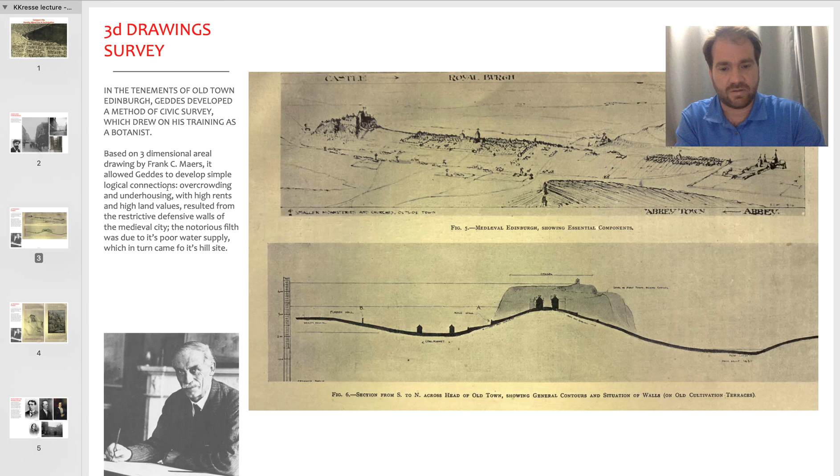This is an image of Maers, a collaborator of his. With him, he made these 3D sketches, sections, analytic sketches, and collaborated in these studies.

Some more of these sketches. So his frame of analysis varies quite a lot. On the one hand, you see how he's studying this city behaving within the context of the bigger landscape, or the region, if you want.

But then he's also looking at projects like these backsides in Edinburgh, and how to make them flourish again, reorganize, and green them again.

So I guess you can say that one of the main features of his work is to be very context specific and not so much scale specific. Context is extremely important, and to work with the context rather than a fixed idea that is superimposed on an existing context.

If you remember from one of our first lectures, I made this division between urban thinkers, where on the one hand we had the ones proposing that urban planning and urban design should be done by well-trained smart individuals that get a lot of power, because these specialists can make better decisions for the people than the people themselves.

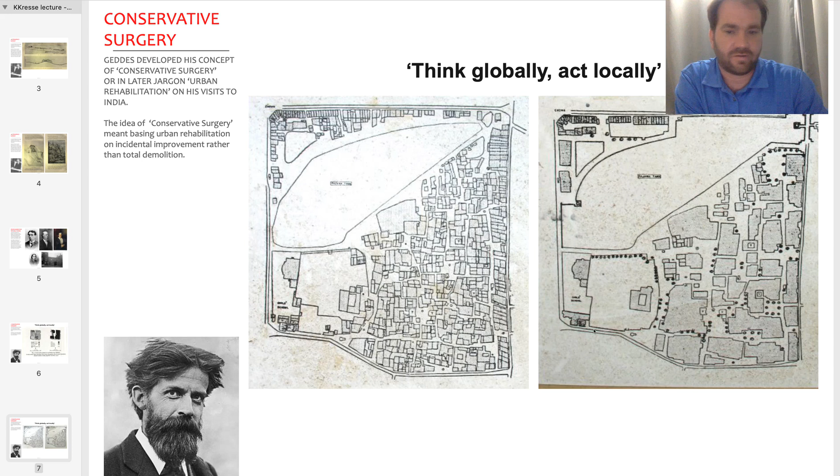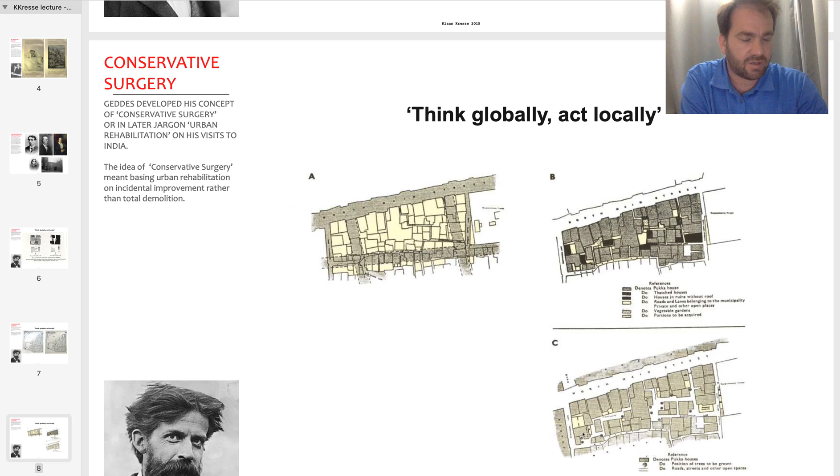This is another example of the same thing. Again, you see existing urban fabric in this brownish gray. It's overlaid with what top-down planning authorities were proposing, and instead of this kind of gridiron plan, he is making this very delicate analysis of the different qualities that you have there, and then proposes incidental demolition or redevelopment and improvements to the public space, to end up with this new urban fabric.

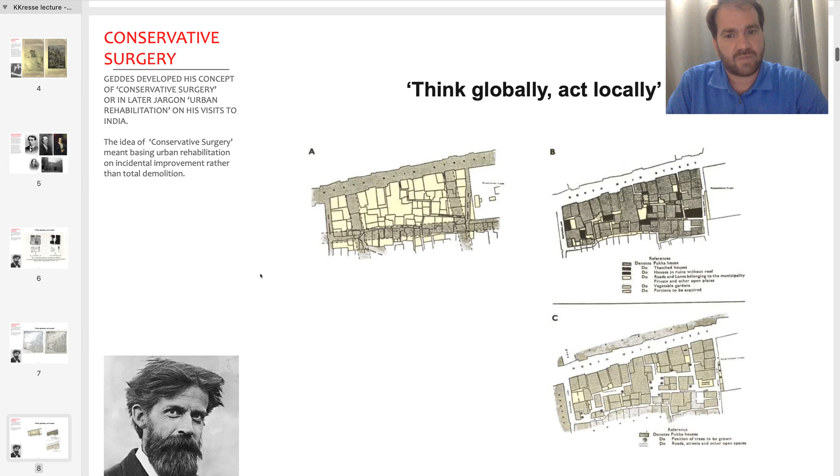So today it's called urban rehabilitation, and we will also see that this has some reference to Seoul, where this kind of strategy now has been taken over since Mayor Park tried to diminish the old new town redevelopment projects. But we'll see that in a little bit.

So another example from India. As you know, the British were the colonial power in India, and Indian cities were notoriously in bad state. One of the main problems for the spreading of diseases and the dirtiness was the lack of a good wastewater and sewage system. So then, for example, here in Balrampur, beginning of the 20th century, the British tried to impose a new city development in which they had high ambitions. So here, every house should have their own toilet.

So, of course, this is a good ambition, and carrying this out would help the city tremendously. But what Geddes would criticize about this type of planning is that it's not really feasible to carry out for the entire city. So what you could do is take part of the city, maybe a neighborhood or a bit more, that is built impeccable with all the standard of living as you have it in England at the time. But then you wouldn't be able to afford to improve living standards in the rest of the city. So it becomes very selective, right? And what he points out is that just the choice to build this water flushed latrine would cost as much, if you combine it with all the costs for infrastructure, as the rest of the house.

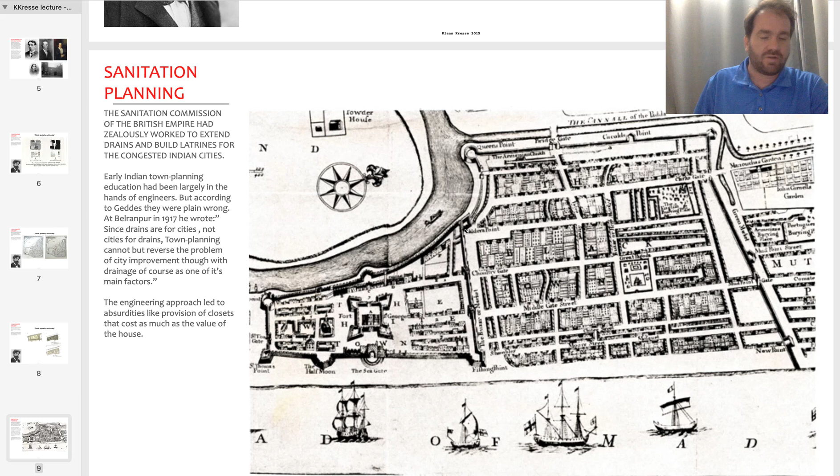So that he would call absurd. Instead, what he's proposing - I'll show you in a second. But the result was that once this has been carried out here in this area, this looks like it could be in England, right? But then on the other side, you still have the informal city that has been growing wildly with all the problems of overcrowding, sanitary problems, and so on. So in a way, you don't really fix the problem. Generally, you only fix it incidentally and locally. And what Geddes is looking for is a system that could help everyone despite the lack of funds, despite the lack of money that the government has to implement it.

And this is his idea that I was introducing earlier. So what he's saying is that one should look at the way that the people live, the local economy, the occupations of the people, customs, history, and so on. And what he came up with is an idea to try to clean the city without having to build this tremendously expensive sewage system with all these latrines in every house. So he's referring back to the occupation of the street sweepers that you would have in India, which could, next to sweeping the streets, also be the persons that collect the feces from the houses.

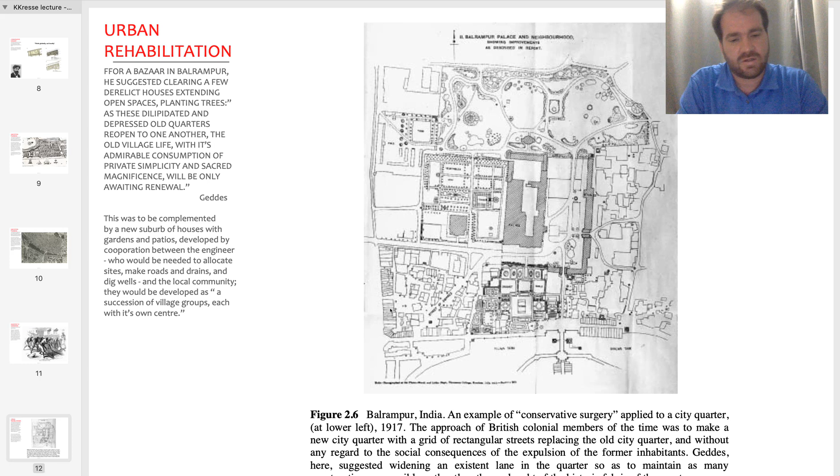And the whole exercise has something to do with trying to find beauty in the existing structures, existing culture, even though not everything is perfect and shiny. It's a different way of appreciating what is there, and it's looking for a different kind of beauty, if you want. So what he's saying is that this approach would be cheaper. You could help more people, even though you help everybody only a little bit. You could help more people, and it would be cheaper, and in the end would improve the living conditions of everybody. There would be less sickness and less death rates.

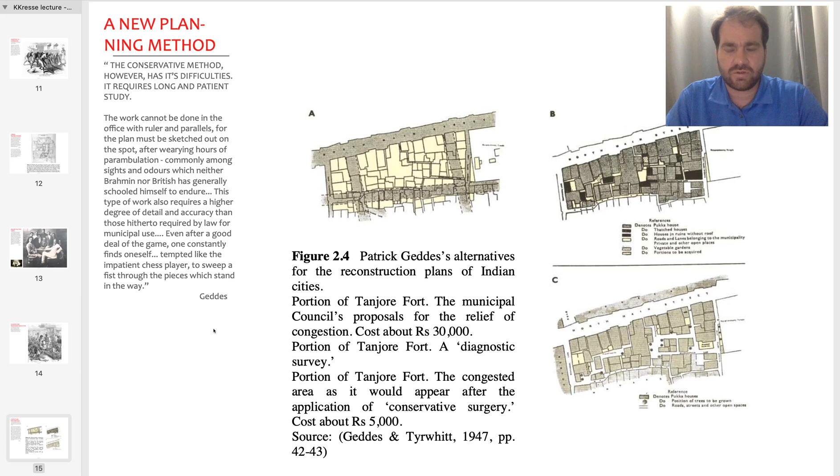This just as a kind of reminder of how this process works. And then from here, I think we should go to Seoul. Right, next one is a new planning method for Seoul, which in fact has been around since the beginning of the 20th century. So this idea of urban rehabilitation is already more than 100 years old, but nevertheless still used.

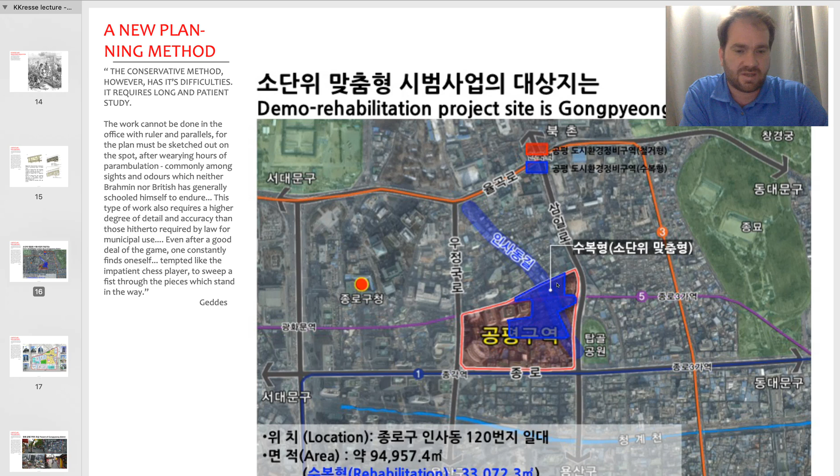So here, this is an example of urban rehabilitation in Insadong. Everybody knows Insadong, I suppose. Gyeongbokgung over here, and there's the main street, the pedestrian street going down here, and this then should be extended into this area. The original plan is what you can see here with the blue and the red outlines, and the existing fabric is what you see underneath. So the existing urban fabric is very small scale.

Lots of traditional houses, probably hanoks, and other old houses. Urban grain is very small, very densely built, and you have only small narrow alleys. Not only, but a lot of small narrow alleys that are walkable, and few streets that can be used by car.

What the new plan was proposing is to combine these lots and then redevelop them with big buildings. So that's what you can see here. The blue ones are the ones that have already been carried out or are under construction at the time, and the red ones are the ones that are planned but have been stopped by City Hall in order to try a different approach.

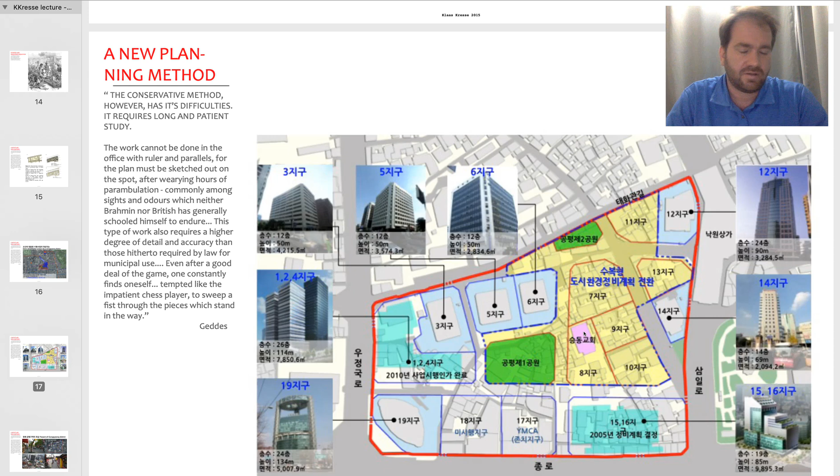So this is urban rehabilitation. What they did instead is define a planning area. Essentially this is what was left, what has not yet been developed. Similar to what Geddes has been doing, they looked at the qualities of the existing, or tried to find qualities of the existing.

For example, the narrow alleys with all the small restaurants and cafes, which looks quite messy and not beautiful in the traditional sense, but on the other hand it's very original and in a way sympathetic. When I have friends coming over from Europe, I always take them to these areas, and people are always impressed with this, right?

We don't have that in Europe, and these kind of small spaces are often so lively and active, and it confirms a little bit the maybe romantic idea of Asian cities that are busy and full. That's an experience you can find here. So it makes sense to have such a strategy in an area like Insadong, where a lot of tourists come, but of course it could happen in other places as well.

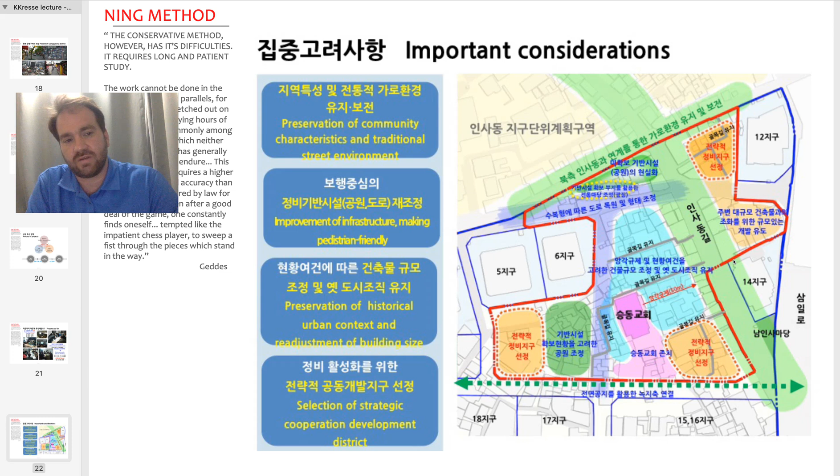Different type of zoning, right? They decided what part of the urban fabric to keep, what kind of zoning goes where, how to improve the infrastructure, what characteristics to preserve, what kind of identity to preserve, and also what kind of industry to stimulate, or what kind of local business they want to support. So actually it's not only about the urban fabric, it's also about the people that work or live there, and how we can provide them with a new way of living, or maintain their existing way of living, even though the area is changing.

Yeah, and that's what you see here. This is the old plan, and that is the new plan. So much more diverse and small scale.

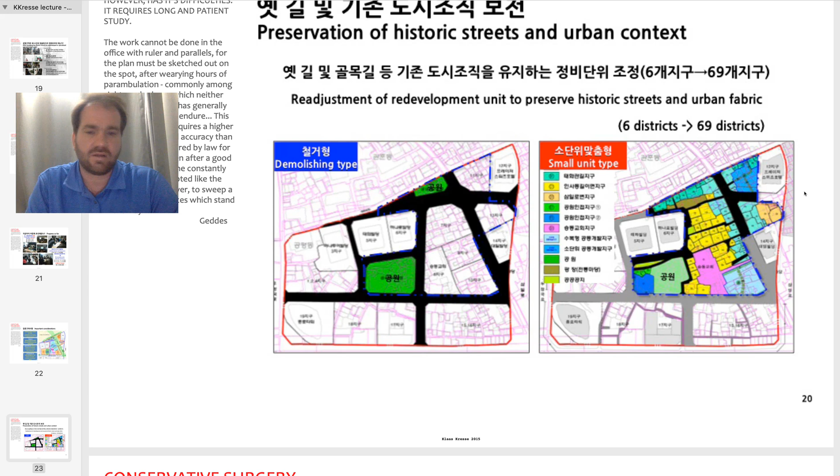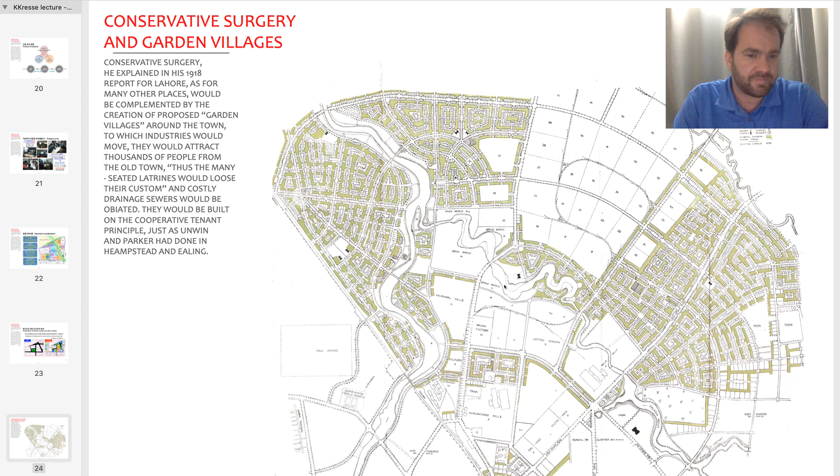And then, this is another image going back to Patrick Geddes and his ideas for India. So this is more to be complete. Patrick Geddes did not only make plans for urban rehabilitation, but he would also make plans for the layout of new developments of entire quarters of a town, as you can see here, where it's much more traditional, with a kind of perimeter block, front yard, backyard idea. So this type of planning he would do as well.

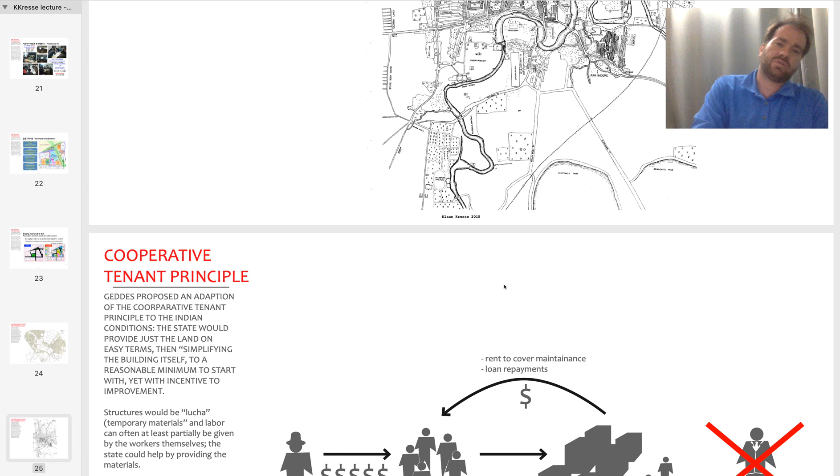Another image of one of his projects—I'll go through and introduce what he calls the cooperative tenant principle. Here you can see the universal approach of Geddes: he's not only thinking about the space and how to improve it, but also how to maintain the culture and local economy, local businesses, and work with the people of the area in the redevelopment process. So he proposes this cooperative tenant principle.

What that means is basically that the residents, the tenants of an area, collaborate with the federal government, or it could be the local government or the city, and they get money from the city—maybe it's a loan or a backing of a loan, it doesn't matter so much. Somehow, with the help of the government, they have access to capital. They get a loan, and with this they can build houses or renovate existing houses and improve their welfare, their lifestyle, and build the types of services and leisure activities that they need.

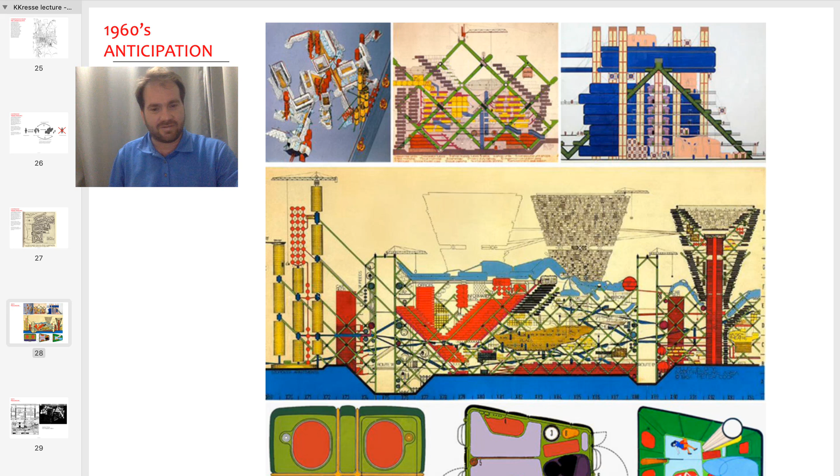This has been an architecture movement in the 60s that was very explorative and experimental. You've probably heard of Archigram and Archizoom, who explored new ways of living, including individualistic living. Here you can see ideas of people living in self-organized communities, where the architecture becomes a big framework filled in by the people themselves—fantastic and fun projects to study if you're interested in this kind of architecture, using pods and the idea of repetition.

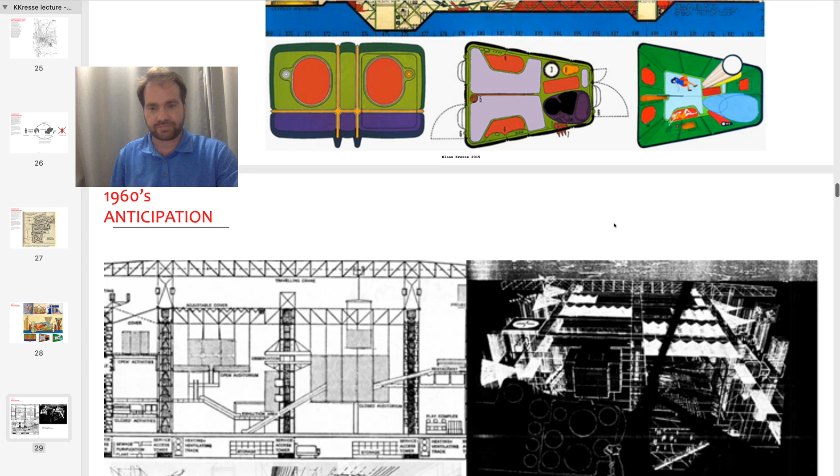Then in the 60s, another interesting project to study also uses the idea of a framework—a big industrial infrastructure that can be flexibly filled in. This is the Fun Palace by Cedric Price, a classic project.